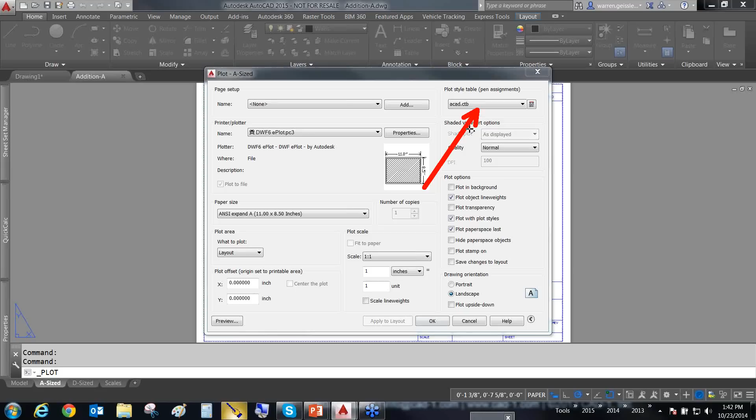When you assign a plot style table, you'll use a drop-down list, and I'll show you where these are stored in a moment, and who's going to be editing them and building them. Autodesk gives you a handful that come prepackaged with the AutoCAD applications, and you can use these as kind of a roadmap. First thing I'm going to say before I even get into editing a plot style table and talking about what color tables are is Autodesk gives you a handful of pre-built color tables to go by.

This is good and bad. Here's the good: use one of these as a roadmap for doing what you want it to do. As an example, if I want to print everything in black and white, I want to start with the one called monochrome. Now here's the bad.

Don't ever set one of these up as your company standard. Why? Because if you do, somebody else is going to, and they're not going to rename those. So if you decide to set one up as your standard, or you want to use one, you're going to find out where they're at in a few moments, and you're going to rename it.

Put your company name there. Put a prefix, a suffix, anything you possibly can. Just don't keep it the same name and use the ones that come right out of the box. That's the same kind of stuff everybody else might be using. And if they send you their drawing and their color table, you're liable to overwrite files with same name issues.

So, I like that. I just saw the one question: what's a pen plotter? Chris, be very, very happy that you don't know what a pen plotter is.

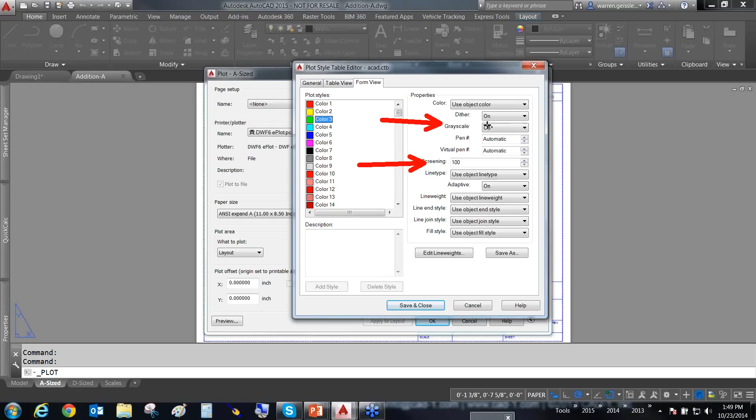Another thing, for the lightweight pens, or where I would use screening, you may want to use a grayscaling and/or a dithering option for those of you with pen plotters. This will help the plotter actually generate the line types, generate the line weights, and generate the screening values that you may want.

Alternatively, you can go call HP and get rid of the pen plotter and go buy yourself a laser jet printer or something else. But for those of you using pen plotters, these are the options that are going to be important to you. Things like line weight don't make a hill of beans difference. The color doesn't make any difference. It's which pen number you're telling it to pick up out of the carousel.

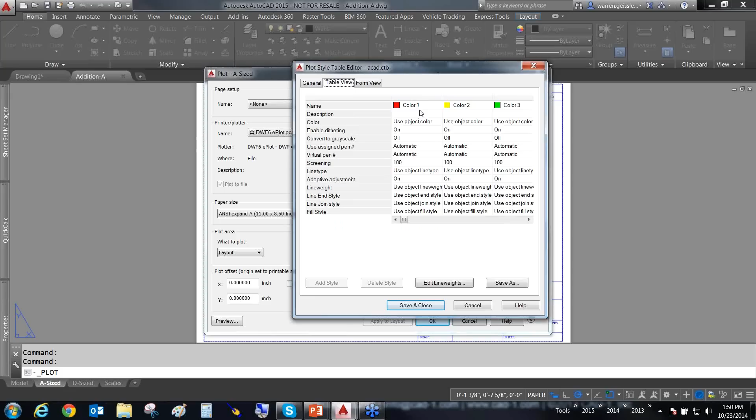Now you'll notice up here we've got 3 tabs. General is just where I'm going to rename it or something. The table view lets me take it a 1 color by 1 color basis - not a great option. So typically when we're in color tables, I'm working on the form view. I'm telling the program I want to take these colors and print them this way, and I want to take that color and maybe that color and print them a different way.

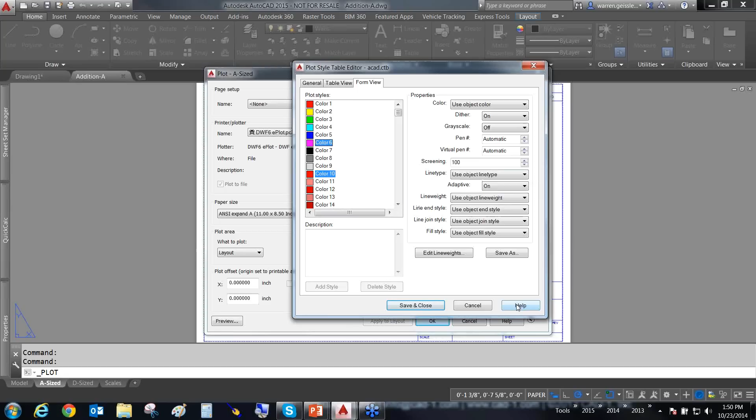More information can always be found inside the help system - it's really handy. But when I get done and I save and close this, it's going to get stored wherever I tell it to store, and I'll show you where those are in a minute. How many of these can I have? Unlimited number of color tables.

Okay, so color tables, CTB files - what are they? They're a plot style table that adjusts things on a color by color basis. Oh yeah, and I did mention something a couple times - I was mentioning that the program's going to be using your logical colors.

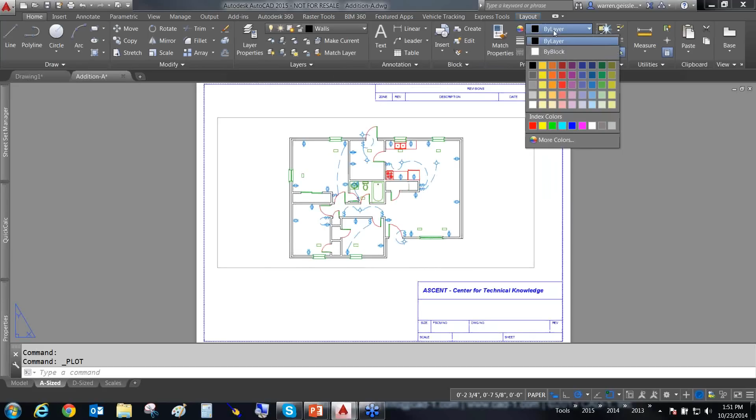When you're setting the color of a layer, we're talking logical colors, or what Autodesk calls index colors. This is something I have to stress to everybody I run into all the time. I'm using a color table system, and I set my colors, but it's still printing in color even though I told it to print in black.

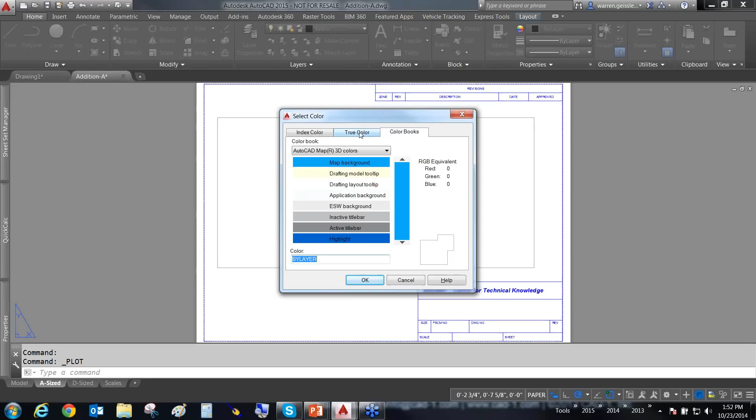How come? Not these - not the true color ones or the color books, which actually use a variance of true color. If you use a true color inside one of your layers, AutoCAD's going to print it whatever color you pick. AutoCAD is mapping these 255 colors to different pens or options, but true color doesn't map those whatsoever.

So the rule here is that if you want to use a color table or a system, you're going to stay away from true color. If I want to print a rendering, a nice background color or palette, or some of the neat gradient hatch patterns, I'm going to use true color. But for everything else, you've got to use the index colors.

Back into the PowerPoint. Okay, so with color tables, look at the color of the object - not necessarily the layer. Hopefully you are all using color by layer, but sometimes we need to override a color on an object by object basis, and it's going to change the plot settings based on that color by color basis.

So the next thing to talk about is the named styles, or what are called STB files. I know that sounds pretty horrible - STB files. What happens when you get a drawing in that's using an STB file, and how do I deal with it? What is an STB file? That's another question we get all the time. Okay, what is an STB?

It kind of takes it in reverse and ignores colors. With an STB file, which I'll show you in a moment, you override the plot settings on an object by object or layer by layer basis - and at no time did I mention color. Basically, I'm going to build a style called thick pen, another called thin pen, and another called medium pen shaded 50%.

And I'm going to apply these styles on an object by object or layer by layer basis. Keep in mind, when I talk about object by object basis, you can apply a plot style to an entity - a line, a polyline, a circle - inside AutoCAD using the property windows. You cannot do this on Civil 3D objects. For those, you've got to get into the layers or styles. So anybody using AutoCAD Architecture with intelligent objects, the object by object basis won't work.

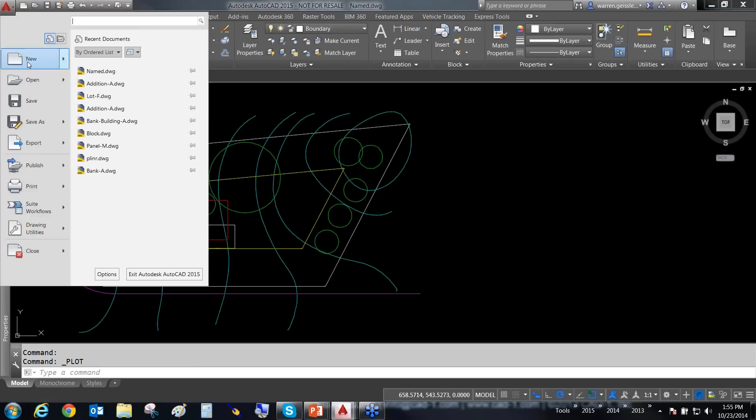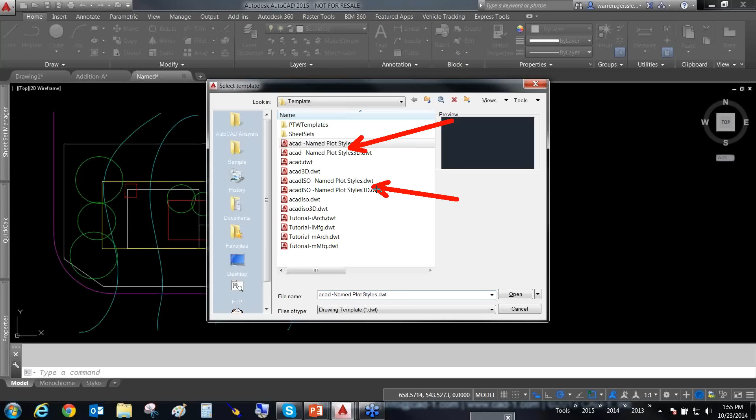Now you'll notice when I got into this drawing and pulled this list down, this is not the same list you saw a moment ago. So how does AutoCAD know which and when? Well, when you start a blank brand new drawing using a template, file new, AutoCAD has whether or not you're using named plot styles as a separate template setting. That's information embedded in the drawing, on a drawing by drawing basis - whether I'm using a color table scheme or a named table scheme. You can only use one or the other, not both. You can switch back and forth between the two, and I'll show you how, but you can only use one or the other at a time.

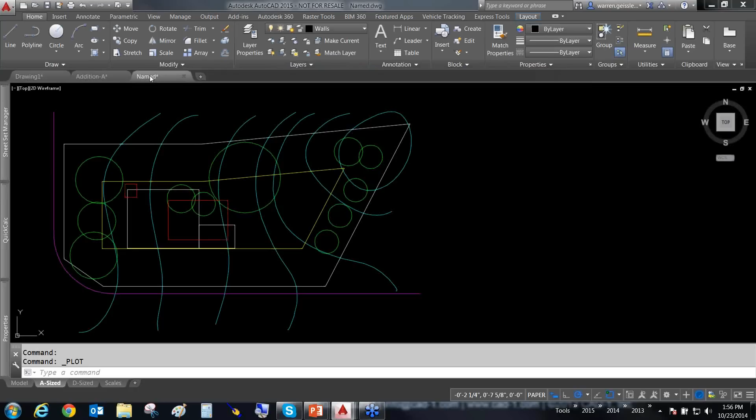So when I'm back in that Addition A drawing and I go to print my drawing, you'll notice I've only got my color tables, my CTB files built in here, not the STB files. When I get back into this other drawing and go to print, you'll notice I've only got those STBs.

So I can only apply one or the other. Now, one thing to always remember, regardless of the system that you're using, the color tables or the named tables, AutoCAD allows you to assign a color table on a layout by layout basis. It would be really nice if we could assign them on a viewport by viewport basis, but they never got that working. I'm going to show you how to fiddle around with that and change it. But it's always on a layout by layout basis.

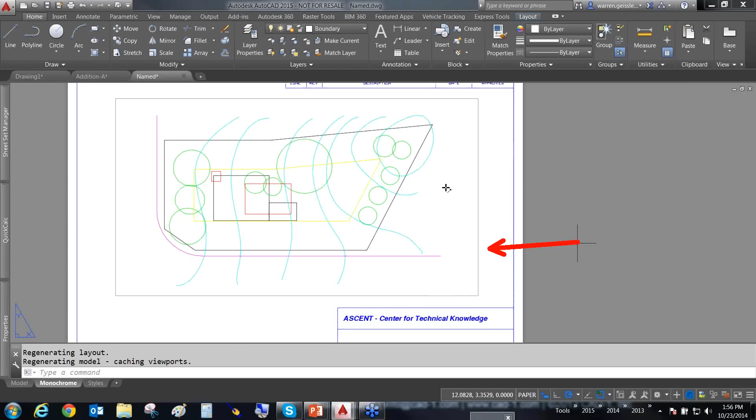So when I come into this layout and I'm going to print, I've got to assign the table that I want to use for this particular layout. I can change my mind at any time in the future, but I've got to assign it as soon as I'm going to print.

Warren, before we get too far away from Taylor's question here, take a gulp of water and a breather, and I'll read this. We have a couple of different color tables and would like to make a simple printout that illustrates the variations in the weights and screening for the various colors. Can you recommend a way to do this?

Unfortunately, not a great way, because, and I'm glad you mentioned that, Stan, because I just mentioned your limitation right there, is you can only assign a table, regardless of the type of table that you're using, on a layout by layout basis.

So really what you want to do is have your line work, like you'll see a lot of CAD standards will have a drawing with a bunch of lines and the colors and how they print, etc. But you'll want to do this on a couple of different layouts and assign each layout that appropriate color table.

And then print it and put the header on it and say color table A, and this is how your line work is going to look, and then another drawing right behind it, color table B, and how your drawing is going to look. You can't put it both on one drawing or all three or four of them on one drawing, but you set up a handful of little 8.5 by 11 sheets with the line work on there, and you show the before and after colors.

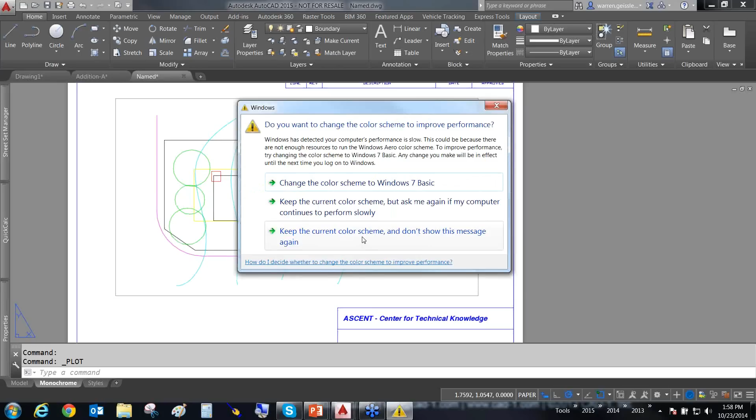Whoa. Every time I answer this question, 'don't show me this message again' keeps asking me that question. Don't show me that message.

Okay, so getting back to my named system here, notice I've got a couple of layouts inside here, and this one I've called monochrome. So when I go to print this one, I want it to print monochrome, so I'm going to assign it that monochrome table, and when I preview it...

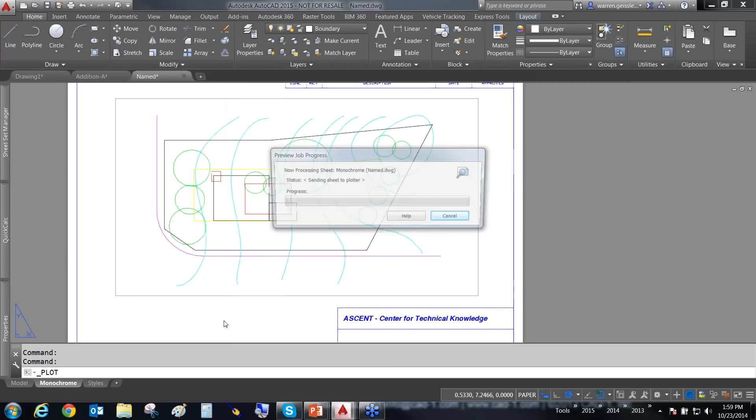Okay, nothing actually happened. So how come? And that's one of the questions that I get all the time. So, did you say that you did want to plot with the plot styles? A lot of times people will leave that unchecked. Or how else were you working on here?

Okay, the monochrome STB, what is the program supposed to do? It's supposed to print everything black. But wait, remember what I said. In the color table, AutoCAD's taking all of these colors and it's printing them black.

With a style table, you build your style black, and you have to apply your table on a layer-by-layer basis. So how would I wind up doing that?

Okay, this is where things can get a little bit difficult. I'd have to go into my layers, and I'm going to have to apply the plot style on a layer-by-layer basis. Now, I'm going to get a little bit ahead of myself. But wait, Warren, what if I wanted this one to plot one way, and I wanted this one over here to plot another way? Then I apply the plot style on a layer-by-layer basis as a viewport override.

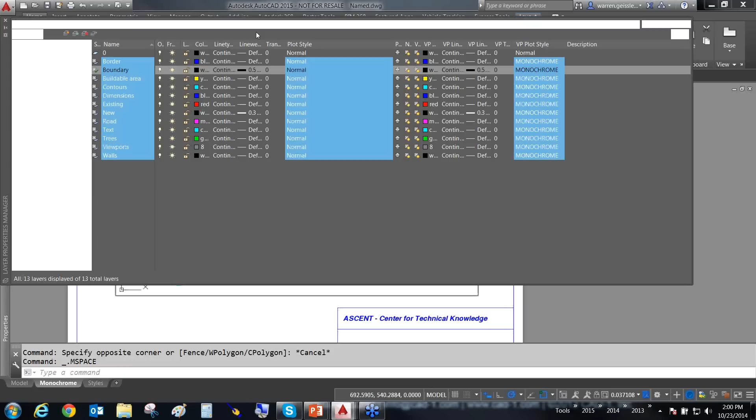I'll talk a little bit more in a moment about those viewport overrides. So I'm going to be doing those viewport plot styles, and I set those up, and that's how you're going to be taking care of it.

It's a viewport plot style. Now, what about this one right here? What if I wanted to plot that one different? I could do the same thing, and I've got the style table.

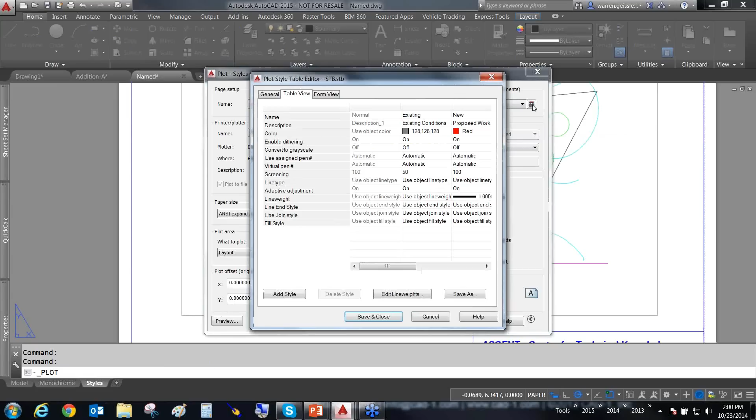This is where, when building a style table, you're going to tell the program—as you see here, I've got a handful of them in here—that I've built a handful of styles. How do I want my objects to print? So at this point, I'm not thinking about how I want this color to print. I'm thinking about how I want my drawing to print.

As if I were on a table drafting and I want to pick up a thick pen or a thin pen or a shaded or something else. So you'll see here I've got one style called existing conditions where I want it to print gray and use the object line weight. And proposed work, I want all my proposed work to print red and a thicker line weight. And my ground to print.

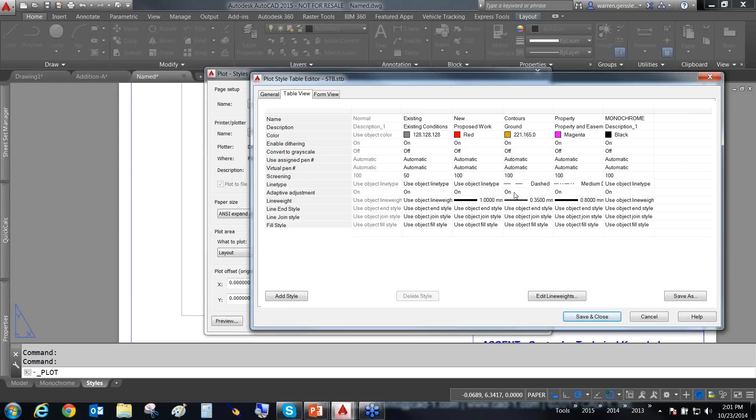So you see here, what I'm doing is I'm building how I want these objects to print, and then building a table out of that so that after I've done this, when I go to print my drawing and I've applied that table, that's what I'm going to wind up seeing. At no point did I worry about colors.

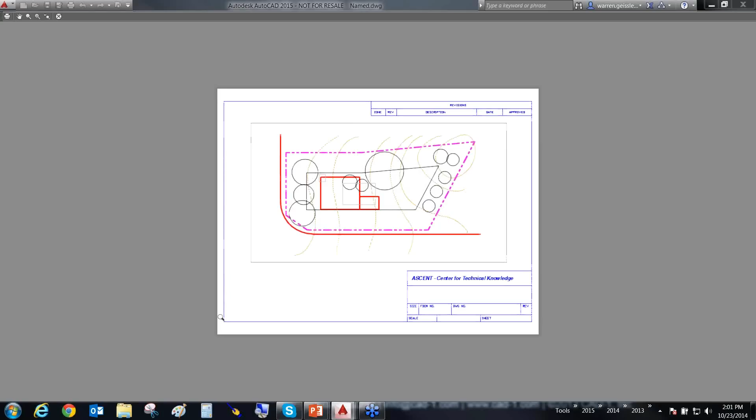Okay, so what color is the layer? What I did was I said, I want my proposed work—and actually my proposed work is on 2 or 3 different layers, and those layers are 2 or 3 different colors. I don't care. I want my proposed work to print red, and I assign that table to either my objects or my layers.

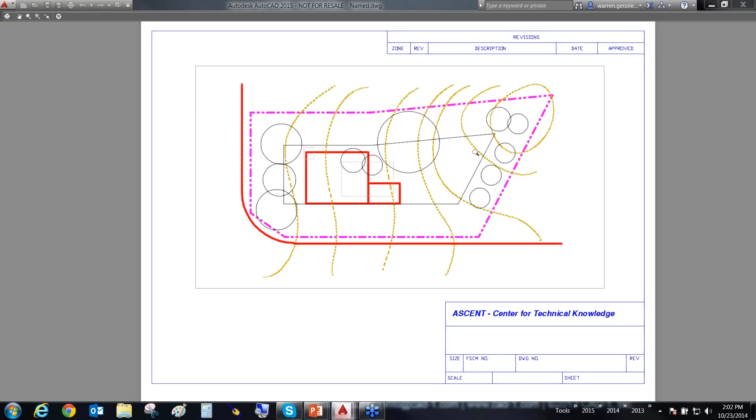Okay, what about all my existing work? You'll notice here that I've got an existing property line or something else, and all these trees and some existing stuff, and I've got those printing with the existing pen. So in this type of situation, I've applied that plot style inside that layout, and I've applied those styles, those names, to either my objects or to my layers.

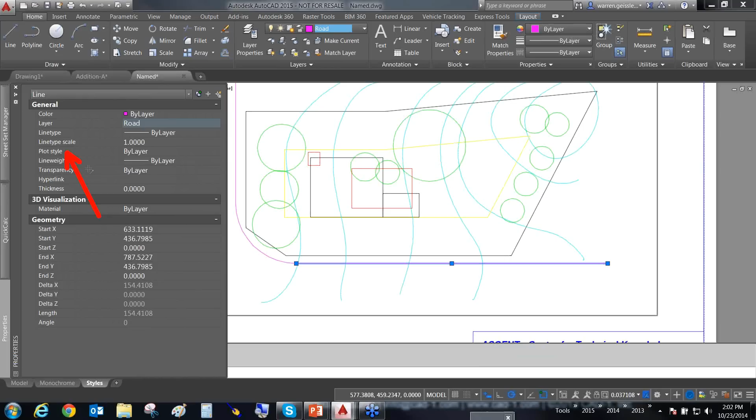How do you apply it to objects? Oh, real easy—like I said, properties window. You'll notice that my plot style option right up here, I can apply a plot style to an object by object basis. So this is where things can get really flaky too, everybody.

We've had for years and years, I want all my colors to print certain ways, but in this instance, I want this object to print one way and another object on the same layer to print a different way. You can really get kind of in-depth in here.

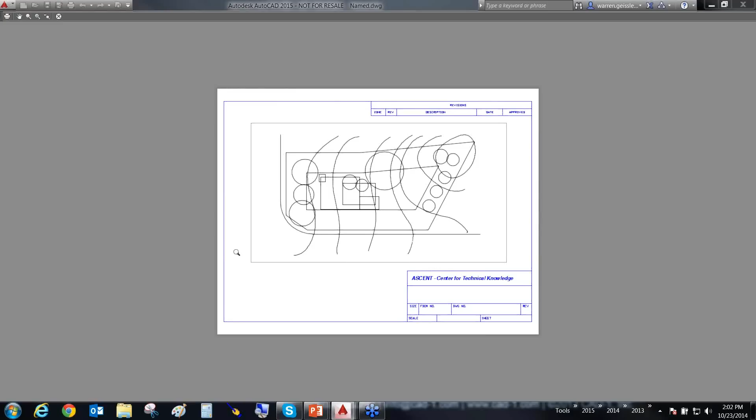Come back to my monochrome print, and I want to change it, and I want to print it, and I'm looking at it, and there it goes. There's my monochrome print because I assigned the monochrome print style to all of those objects. And I said, just take everything and print them black.

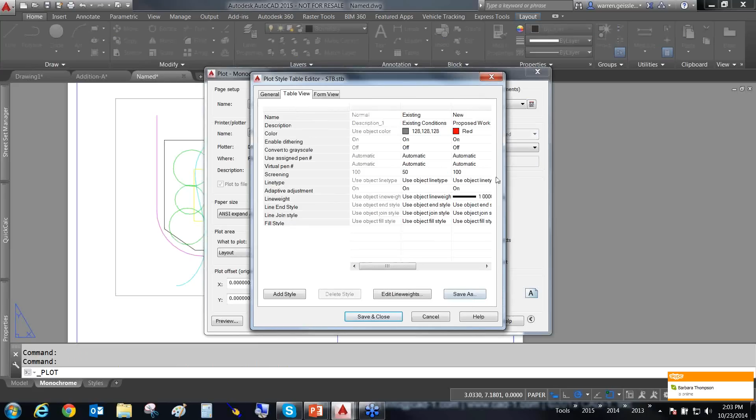So in this instance, I don't have to worry about grabbing a bunch of colors or anything else. I'm just creating a table of how I want to see things on a sheet of paper. How do you want to see things on that sheet of paper? And then you're going to apply them on a layer by layer basis.

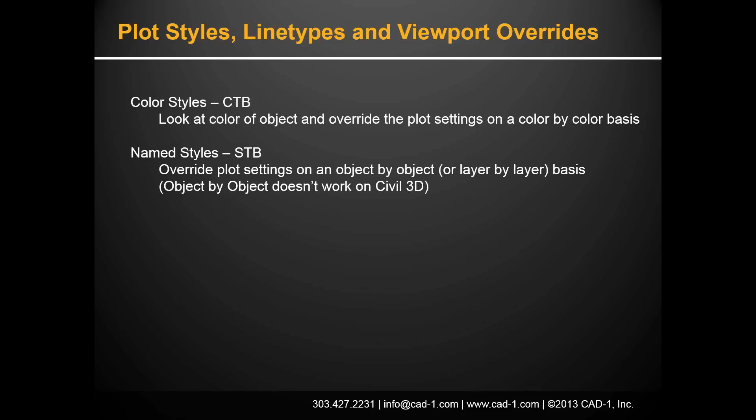Let me get back into my little reminders here. Okay, so color tables take all of a specific color, and it only works for those logical colors, 255 colors. Name tables, style tables—I tell it how I want it to print and apply it to a layer by layer, object by object basis, or a combination of the two, and colors of the layer are completely irrelevant.

Where are these files, Warren? Where do they exist? Every time I go to print, I'm having to tell it where these files are. Or what if I get a drawing in from a consultant and they send me one of those CTBs or STBs? What do I do with it?

Where are those files? Okay, quick, easy, down and dirty way of—I just got a drawing in, I just got the consultant's STB, and I want to print it. How do I do that?

Fastest way to take care of it is in your application menu. You come down here where it says print, and you look down where it says manage plot styles. There they are—that's where my computer is looking for the plot styles.

So without having to worry about changing your files tab in your options, which I'm going to show you, and getting into CAD management, getting into IT management to find out where it is - because I could have told you it's under C users, login name, app data, roaming, Autodesk - and I'm talking and talking, and you're phasing out.

So don't worry about it. Don't worry about going into Windows Explorer trying to find something. AutoCAD knows exactly where it is. Application menu, print, manage plot styles - Bob's your uncle, there you are. All you've got to do is drag and drop.

When I pick that, by the way, this is Windows Explorer. So all you've got to do is open up the email they sent you, open up Windows Explorer, and drag and drop right into this location. What if I've got two that have the same name?

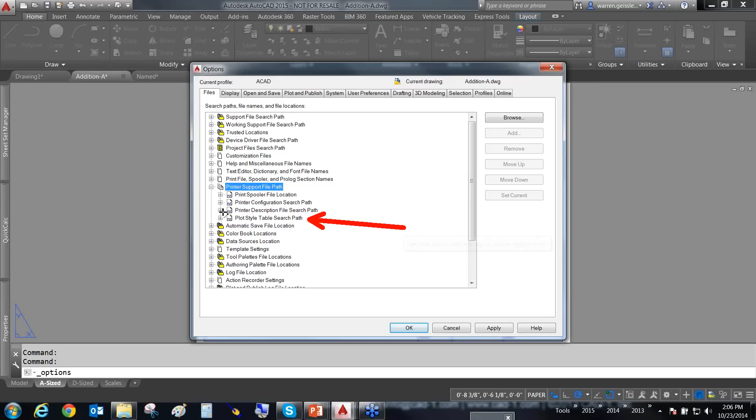So all I've got to do is take my plot styles off of somebody's computer, put them up on the server, and then come over to everybody's computer and point to that one location on the server. Then we're all using the same ones.

Well, doesn't that mean that if somebody changes one, everybody's going to see the changes? Yes, and that's probably a good thing, unless you're the CAD manager and you don't want everybody changing them, in which case you lock that directory and give it user-level permissions, or go around with a big oak stick beating on people for changing your files. But it's in the Files tab, and you tell everybody not to mess with it, go through CAD management, but everybody gets to share all of your plot styles in one location. Pretty easy.

That's where those files exist, and that's what they look like.

So what are the plot settings we're talking about, and what kinds of things can we change? Actually, I should have put that at the top of the list since I already went over it. As you open up each one of those, you can override the object's color, the line weight, the line type, etc.

It's called reinforcement. Reinforcement, that's right. Reinforcing the learning, that's right. Can I change my mind? We have this all the time.

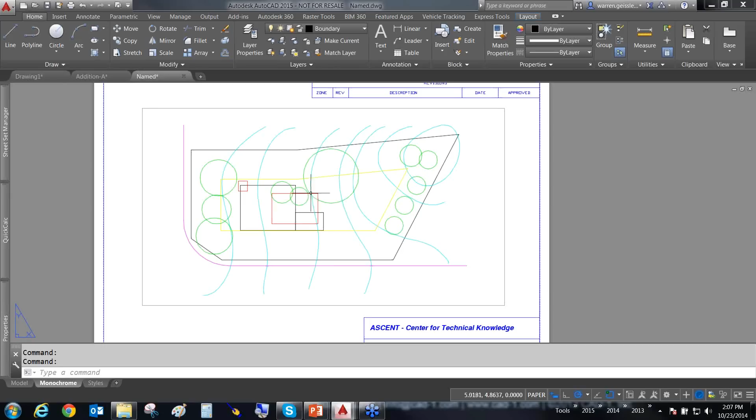I had a company that got into named plot styles and started playing around with them. One or two people in the company thought these were the best things since sliced bread - it made life really, really easy. And everybody else said, okay, but when I print, what color does this red print out?

And they kept saying, well, I don't know - what layer is it on? I don't know what layer it's on. It's like 500 things, I just want to know what color this red is going to print out at. So basically, we were having a bit of an issue getting them migrated over to this whole named style system, and they were going a little bit crazy.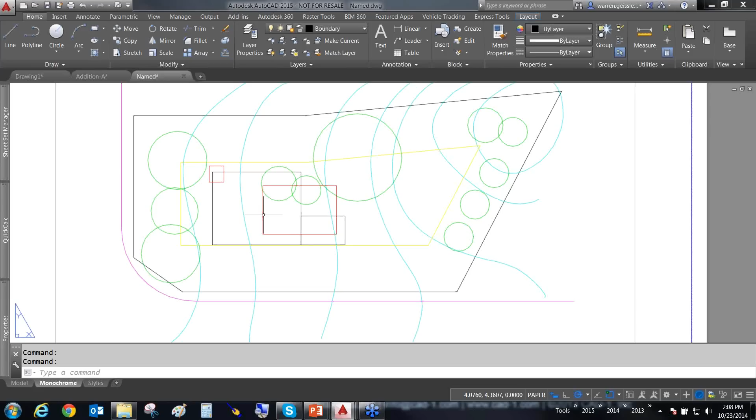After about 10 months, the company decided named plot styles just weren't working for the mentality of their users, and they needed to switch back to color tables. This was after we had done a whole bunch of projects and there were a bunch of drawings. So how do you fix it? Can you change your mind? Yes, you can - there is a command in AutoCAD.

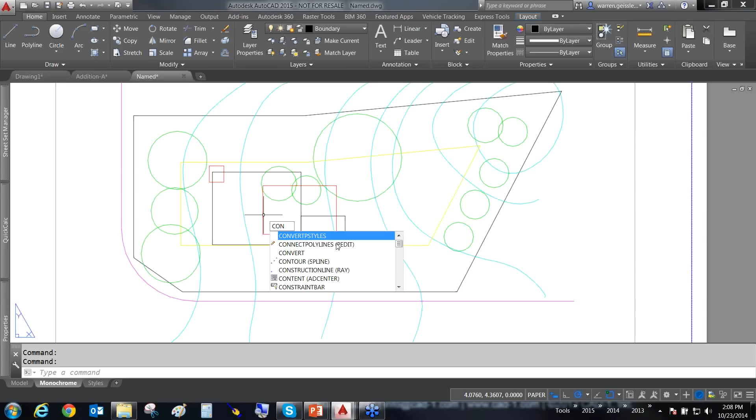Con-E-R-T. Notice what I spelled and what AutoCAD's finding for me? I love autocorrect, that's the coolest thing in the world. It says, okay, I know you typed convert, but there's no such thing. So what about this? Okay, anyway.

So the command you're looking for is this one right here, Convert P Styles. That's one you're going to want to use. This will allow you to take a CTB drawing, a drawing that's using CTBs, and change it to STBs. This is how they migrated all their existing drawings so they could use the color or style table system, just with one command. All plot style names, everything gets changed over. You can also convert from the STB system back into the CTB system.

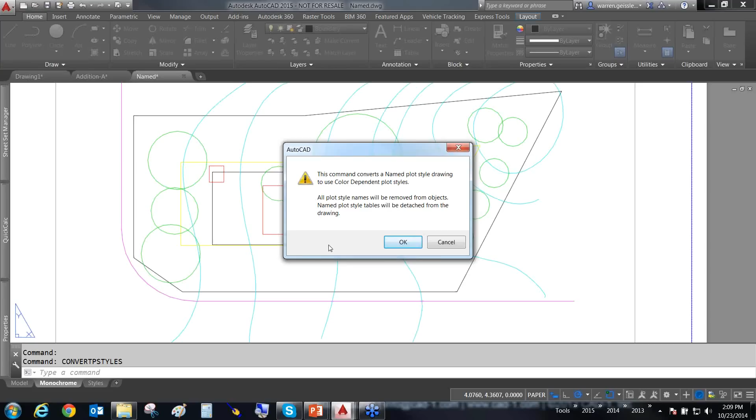Now, if you're using the color table system and want to convert to a named style system, but don't want to go through and reassign everything, you've also got this command, it's called Convert CTB. It'll take your current color table and convert it to a named style table, and all you have to do is go in and change the names from color 1, color 2, color 3 to thick, thin, back-shaded, or whatever. So if you've got a really cool color table, rather than reinventing the wheel and rebuilding a whole new style table, you use this command, and you can convert your existing color table over to a style table. Bob's your uncle, do a little bit of changing, and go play 9 holes of golf.

And with that, Joe asks, are the STB and CTB files stored together in the same folder?

Yes, sir, they are. As I mentioned before, if you come down here in your application menu to print, and you look at where it says Manage Plot Styles, take a look at that list. You're going to see my CTBs and you'll see my STBs, they're all in the same location. You cannot separate them out into two different locations. If you do, you'll wind up having to go and tell AutoCAD where to look, one time to another. So you want to plug all of these into one folder, one location, and don't use the same name. Seriously. And yes, with that said, Bob's my uncle.

And what happens if you have PCP files and want to change the CTB, or PC3 files, that comes in from Cornelius. Okay, the plotter configuration you're talking about there, that's not necessarily your plot styles, but it might have to do with a pen table. Your PC3 files are your printer...

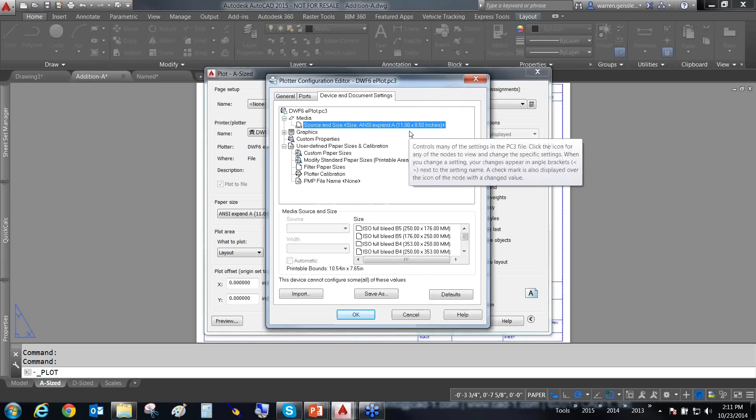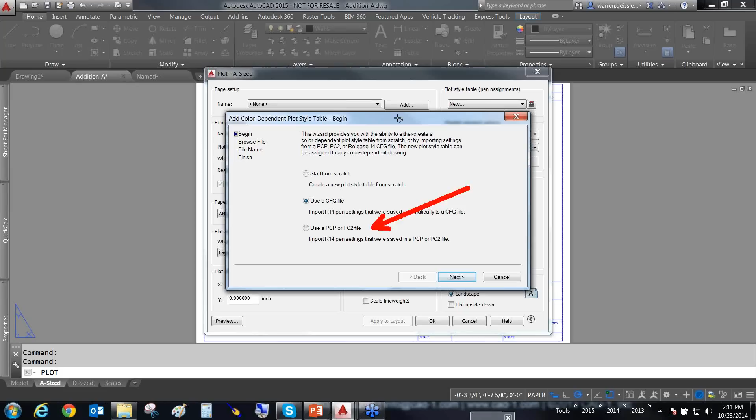property files. If you want to take an old PCP file and turn it into a color table, that's where I could go down here and choose New for my color table, and import the settings from an old PCP or PC2 file. Now the actual plot settings, the driver settings, not the color table settings, but the driver settings, that's something you're going to have to rework and build into your PC3 files. But what Autodesk did with those old PCP or PC2 files, I'll give you an idea what I'm talking about. A PCP file was not only the drivers, which plotting device am I sending it to, what type of driver am I using, what HDI drivers, is it an HP driver, but it also had all of my color table information stored inside one file.

So many, many years ago, Autodesk split the two of them out. This is your PC3 information, which is your plotting device information, the drivers you're using, the plotter you're using, and then it took out the plot style or color tables and plugged it in up here. So it split it in half, and that's where both of them went. If I want to reuse an old PCP or PC2 file, I just go up here to New and say I want to use an old PCP or PC2 file. Good luck with that. If you get it to work properly and don't have to do a lot of post-processing, then congratulations. I'll be quite honest, the times I've tried to do this, I spent as much time post-processing what it imported as I would have spent if I'd just created a new one manually.

Okay, so we've got a few other questions here. Warren, Daniel asked, during the conversion, does it delete the other file or the other table? It does not delete the table.

For the Convert Plot Styles command, it converts the color style table to the drawing using the name style table, or vice versa. The tables are all safe and secured. Those are files. If I want to get rid of those files, I've got to go into Windows Explorer, like you just saw a moment ago, and manually delete them. It will not delete the files.

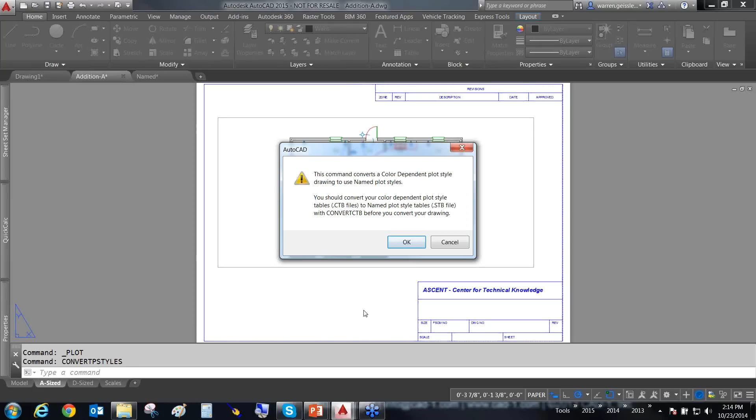Joe asks, what is the Add a Plot Style Wizard for? I would answer: sending young women back to Kansas. That's kind of obscure, so... Oh, that's a bad one. Okay, let me get back in. That's a bad one, Sam.

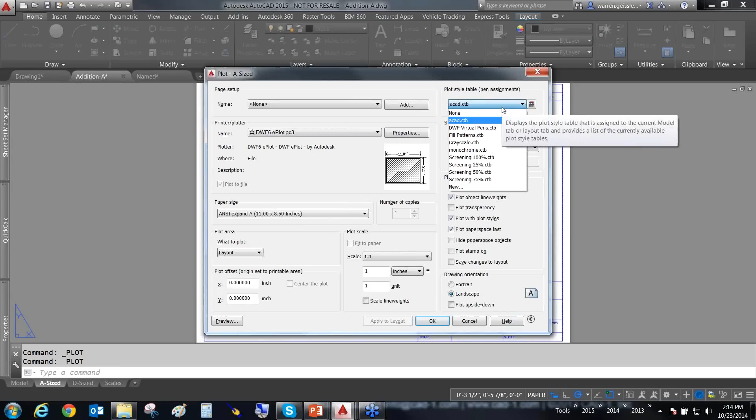Your Add a Plot Style Wizard is for when you go to create a new plot style. This guy right here - I click New - this is the wizard, the Add a Plot Style Wizard. I'm glad you mentioned that, because that brings up some tech support that Denny's going to thank me for mentioning in just a moment. So this is your wizard, basically. Now let me talk about this.

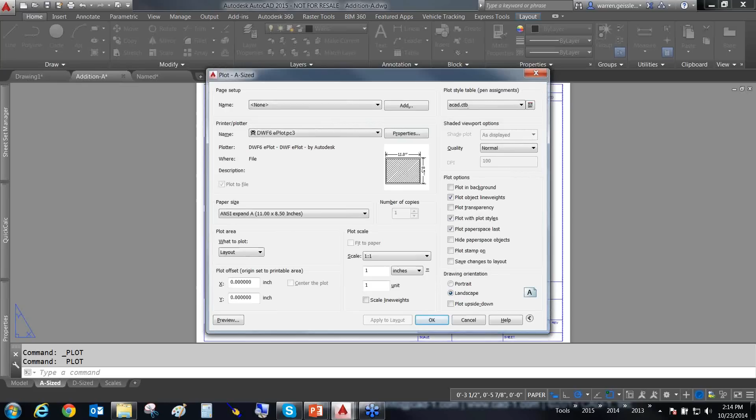Glad he mentioned this. A moment ago I mentioned that if you want to grab your plot styles and put them up on the server, you grab your files, put them up on the server, go to the printer support file search path, go to the plot style table, and change this. That's exactly what I meant.

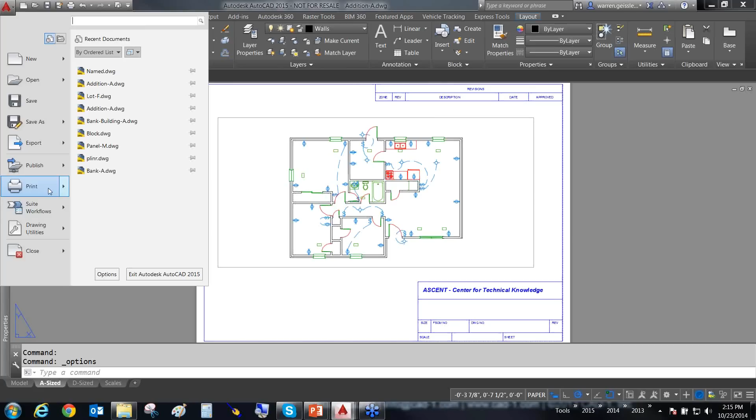You're going to come up here, go to Print, Manage Plot Styles, and grab all of the plot styles and move them up to the server. You are not, in any way, shape, or form, going to grab this wizard, which is a shortcut, and move it up to the server. Please do not move this shortcut to the server.

This shortcut is referencing files on your C drive under your login name. So whenever anybody goes to access the plot files or the color tables, it's going to read the shortcut and try to find a location that is not on their computer, because they don't log in with your name. And if they do, you've got bigger problems than AutoCAD can fix.

But anyway, every time they access it, license compliance will be contacting you soon. Yeah, the license compliance will come down on you.

Watch out. Every time you open up this folder or use the drop-down for the color tables, if AutoCAD finds this shortcut inside that folder, AutoCAD's going to attempt to read that shortcut and the location for it. So do not, last time, do not move this Add a Plot Style Table Wizard shortcut with your plot styles. Thank you for mentioning that.

I have one or two more things I want to make sure we cover. I did talk about switching from color table to named table, and vice versa. If you're going from a color table into a named table, you can actually pull in your old color table styles. You cannot do that in reverse - I can't take a named style table and apply it on a color by color basis.

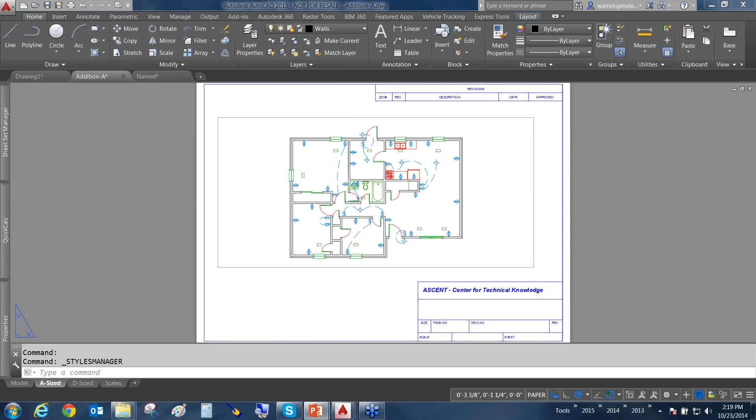That's just impossible. The last question that always pops up - I said this at the very beginning when we were talking about color tables - you can apply them on a layout by layout basis. So what if I've got lots of different viewports and I want them to print differently? What if I've got a drawing with many viewports of different scales, etc., and I want each viewport to print differently?

Way back 100 years ago, when AutoCAD 2000 first came out, one thing people don't know is that they tried this. You used to be able to take an individual plot style table, a color table, and apply it on a viewport by viewport basis. The technology never did work, so it got taken out and locked down, which is why it's not really there anymore.

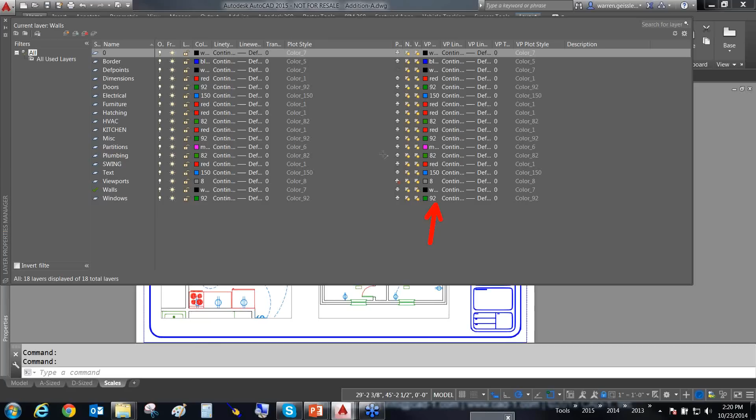So what do we wind up having to do? Many years later, Autodesk ended up saying, okay, if I open up my viewport inside my layout, I've got all my viewport overrides. So if I'm using a color table and I know my red is going to plot thick, and in this viewport I want all my layers to plot thick, fine - I can override all my layers in this viewport so they will be red and plot thick.

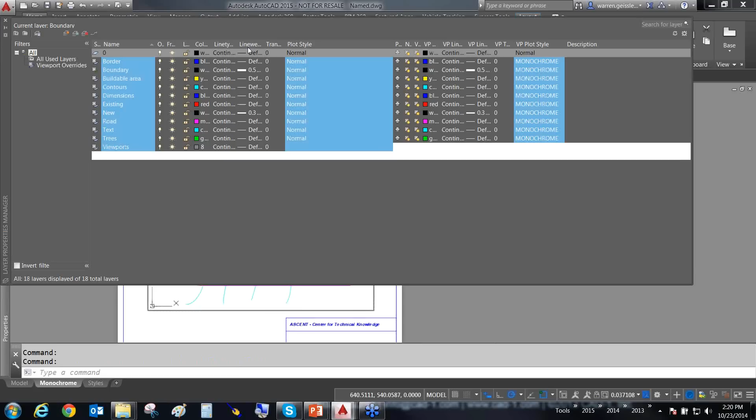What if I'm using a named plot style? How do I do that? Well, it's even easier. For a named plot style, I can override the plot style table on a viewport by viewport basis. This one's supposed to be using the normal one, and I told it to use monochrome instead. So if you've got a drawing with multiple viewports and want them to print differently, just use the viewport overrides for color, etc. You can do the same thing with line types.

Another question that keeps popping up - people ask, all right, I'm going to plot this drawing, it's got multiple viewports, but the line types don't look good. The dash line type isn't looking good between all my viewports. The variables that everybody needs to memorize - the last thing I'll talk about - is LT scale.

Notice how I misspelled that again. I did that on purpose, really. I'm not typing with 3 fingers.

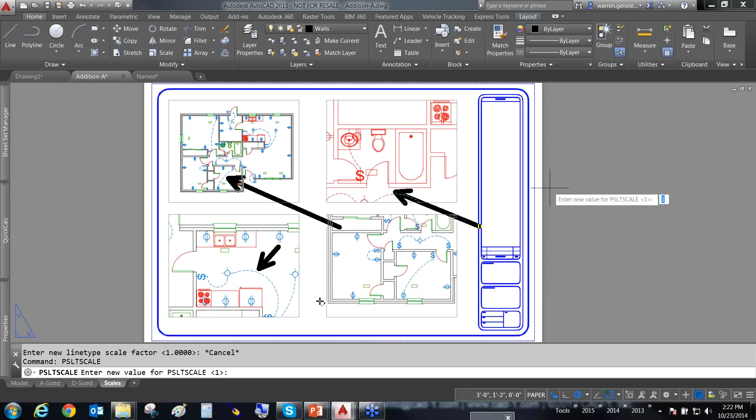LTSCALE controls how all of your line types look throughout the drawing. I want to set this to 1, meaning I'm printing my layout at a 1-to-1 scale. So I need to set my LTSCALE to 1. When I do that, I also set my PSLTSCALE, my paper space line type scaling, to 1 as well. When I set that to 1, it's going to take each of these differently scaled viewports and apply that scale factor for each of my line types so they all come out looking exactly the same.

But wait, if I set my line type scale to 1 and go into model space, then zoom in and zoom in, all my lines are really, really tiny. I've got an 1/8 of an inch dash. How do I fix that?

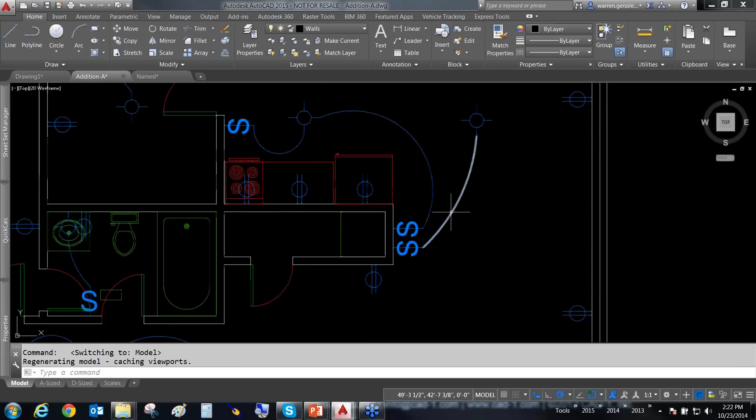As of 2010, you have MSLTSCALE, a third variable that a lot of people don't know is out there. When you set MSLTSCALE to 1, that means your model space line types will scale appropriately according to your annotation scale.

I changed that to something like 1/4 of an inch, regen my drawing, and there you go—those line types look good. Just got to remember to regen the drawing. So: LTSCALE set to 1, PSLTSCALE set to 1, MSLTSCALE set to 1. Bob's your uncle—you set all of that right inside one template and never have to worry about it again.

Excellent, Warren. Mike's got a question here: discuss issues with plotting in 2012 OEM. I can't—well, unfortunately I don't know the OEM version. What version? 2012, okay.

So that's after annotative scaling, so you've got all of the MSLTSCALE, color tables, and everything else. To the best of my knowledge, you should not have any problems, issues, or be unable to do anything that I'm doing here. If that does seem to be the case, we might need to know what it is and see if it's a limitation of the OEM version. Unfortunately, we don't have applications here that use the OEM version, so we might need to hook up to your computer and take a quick peek at what's going on. But that's technology—it should not be crippled or limited whatsoever.

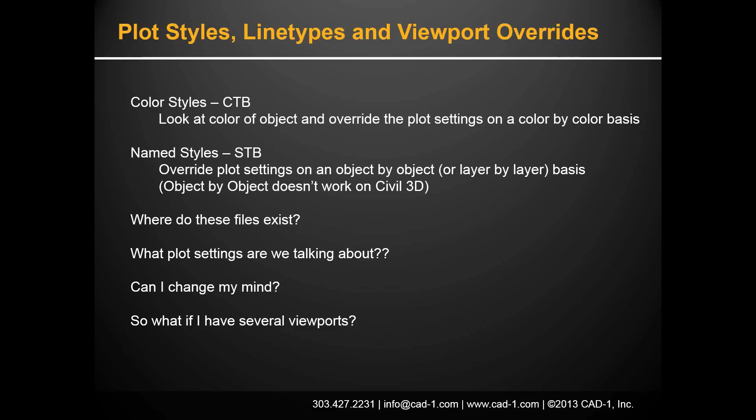Joe asks: when you set up a sheet to plot using DWF6 ePlot.pc3, how do you handle the print borders? On plotting machines, the printable area is less than the sheet size. Does the DWF6 ePlot to the edge of the paper? The DWF6 ePlot PC3 basically will plot—it's a virtual printing device similar to a PDF, and all of that is hard-coded into the PC3 options.

So if I'm looking at things like the standard printable area, I can come into my options for the PC3 and specify or modify that. So if I've got an ANSI A, 8.5 by 11, I could come in here and modify those. All of those are hard-coded in, and remember we can adjust all of those and build them into your PC3 file for all of your virtual devices.

And I'm going to stress this: virtual devices, a DWF and a PDF, are virtual printers—they're printing a file. Even if you're printing a TIFF image or a BMP, yes, you can do it there.

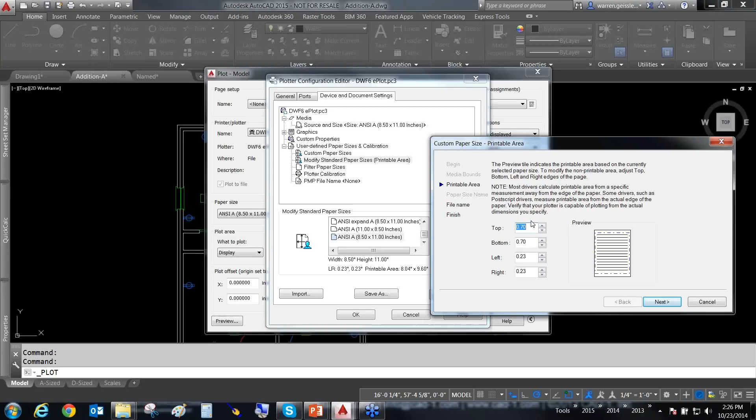Don't really mess with this unless you really know what you're doing and want to spend a lot of time, money, and effort going back and forth. Don't mess with this on a hard device, because with hard printers, this information is hard-coded into the actual device. In other words, if I've got an HP DesignJet 600 and I come in here and set these numbers—my edges of paper—to 0, that doesn't mean the HP 600 is actually going to be able to print all the way to the edges of the paper. So a lot of that information is hard-coded, and you need to look at your user's manual for those devices. But for the virtual devices, this is where you can change that information.

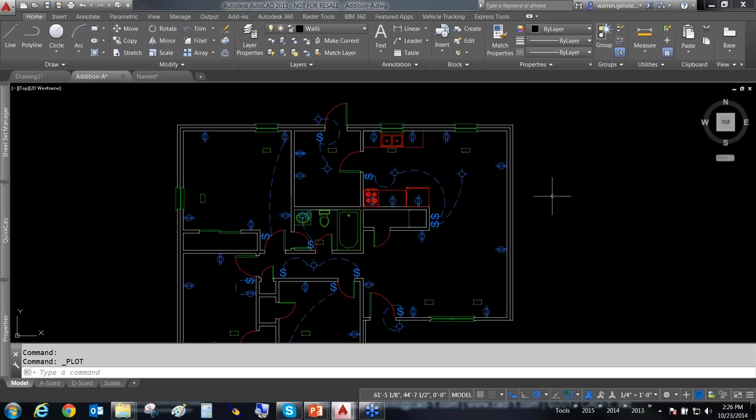The thing to watch out for in a block, if a block or symbol in AutoCAD isn't printing the way you think it should by putting it on an appropriate layer, the first thing to always check is go into the block editor and make certain that these objects are on layer 0 and that they're color by layer.

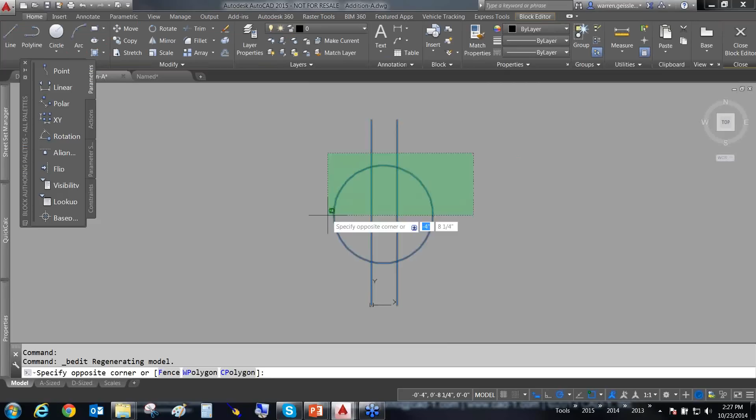You'll notice if I grab these, they were obviously drawn by somebody who didn't know how to do that. They put them on the electrical layer, but at least it's color by layer, so at least I know what layer to deal with.

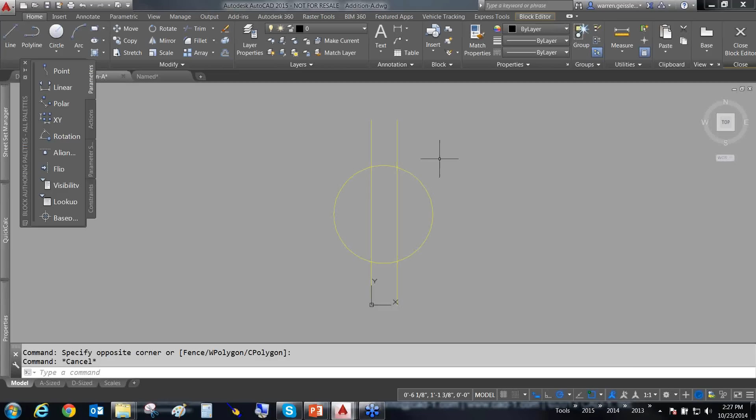A lot of times what I find is somebody has overridden the color of a particular object inside the block editor. So even if I've got it on a particular layer, it may not plot properly. Let me undo that, because I hate that.

Alternatively, this block right here, when I drew it up, was drawn on the electrical layer. That means if I grab this block and put it on any other layer, it won't change. The problem is if I put it on a layer with a really close color, I may not notice the color didn't change. This color is color 130, and the other color is color 5.

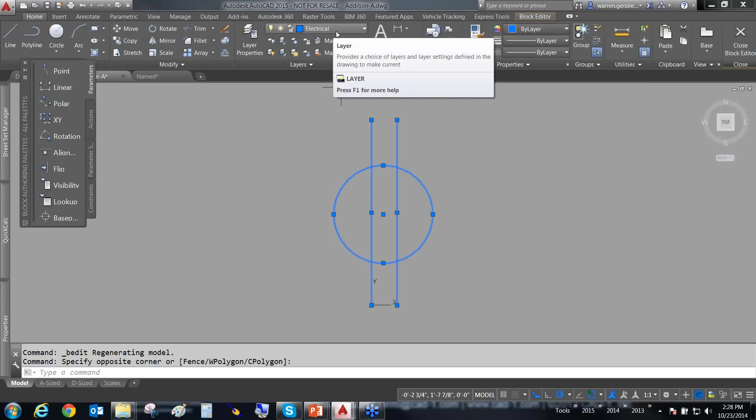So the first thing to always look at with blocks: go into the block editor, make sure the objects are on layer 0. If they're not, the color of the parent layer is going to override anything else you're trying to do. And also make sure it's color by layer. That's the first thing.

Mary Beth, we're not cutting out, we're just fading into the past.

James thanks you for the MSLT scale. He really appreciates that one.

Steve's got a question. We have 2 CAD stations and printers on the office network. I set up a saved plot style on one station. The other station can't plot using the same style. Is that a Windows printer issue, or what?

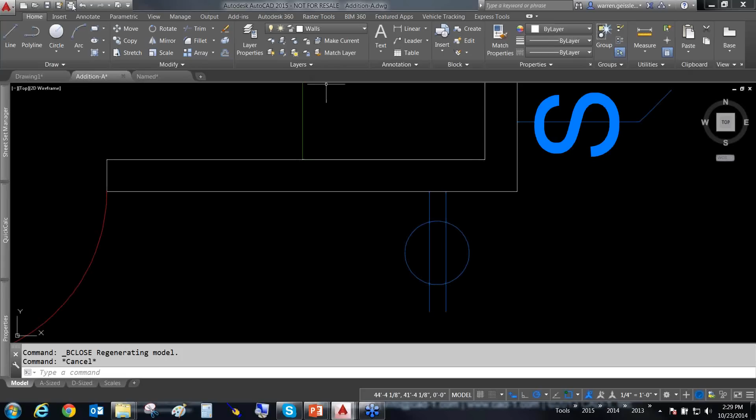For that one, I'd have to ask, it sounds to me like you're talking PC3s, not plot styles. When we talk plot styles, we're talking about these color tables. These are device independent, so regardless of what device you're sending it to, these plot styles should work. If I choose a monochrome plot style and assign it, it doesn't matter what device I'm sending it to.

So if you're having an issue where you do know what you're talking about, and you do mean plot styles, and something's not right, that's when we need to do some tech support and find out what's going on, because these are device independent. Doesn't matter what device I send it to, this drawing is going to come out black and white.

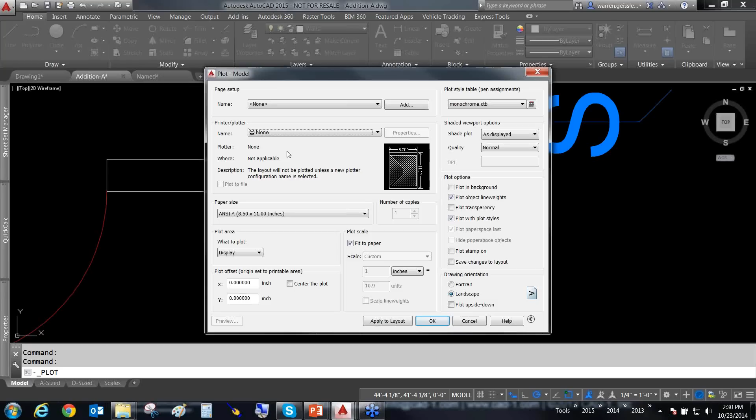Now, if it's these PC3s you're talking about, those are really, really tricky. When you build a PC3, or a plot configuration for a particular device, you can't use a PC3 on somebody else's computer. It could be that they don't have the same drivers on their computer.

Here's another one, which is really goofy. I go over to my devices and printers, and everybody's got this HP LaserJet 4000. How come I can't just share my PC3? Well, it's because when the IT manager installed this driver on my computer, this is what he called it. And on John's computer, he just typed in the word 4000. So all of a sudden, my AutoCAD PC3s aren't working.

So not only does the device have to be the same, the driver has to be the same, the driver version has to be the same, and the name you put inside Windows all has to be the same in order for those PC3s to work on a computer-by-computer basis.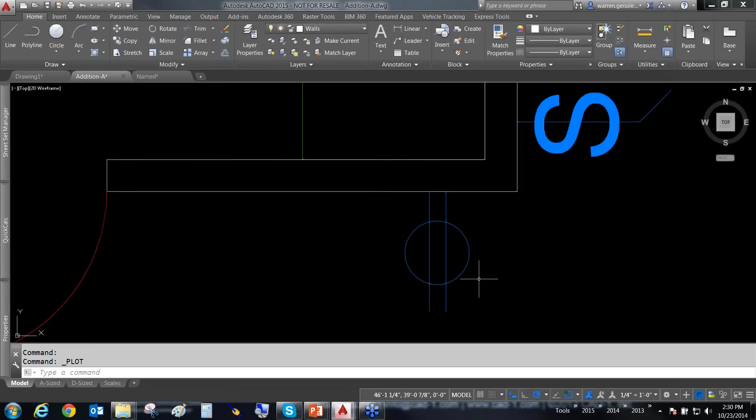Jay asks, Warren, this is kind of Civil 3D related. Why do Civil 3D points text size change from model space to paper space? Yep, you're scaling.

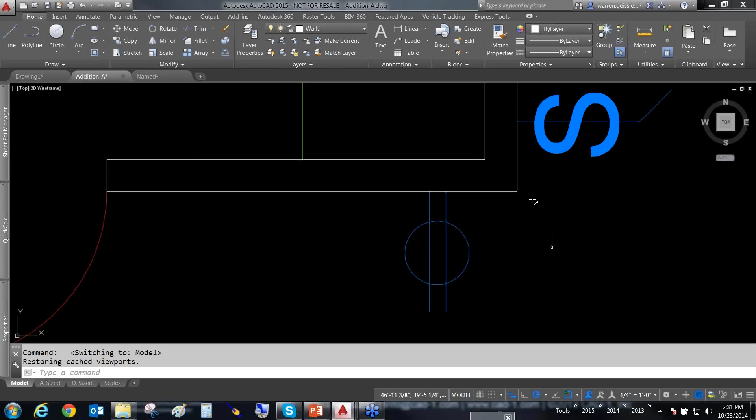Your text size will change depending on what you set in model space when you're preparing to print. You all know you can print out from model space for a check print, so I've specified what I think I'm going to print at. But when I come into paper space and set up a viewport, I'm at a completely different scale factor. Scale factors have to be exactly the same inside the viewport as they are in model space for the text to print correctly.

So if you've got any kind of question, show up at one of these webinars and get it answered. One of the things we always say is that it's Car Talk without the Boston accent.

I like that, Jeff. I can talk with a Boston accent. I'll hurt myself, but I can talk. I've got to park my car. But one of the things we tell people on those webinars is that we will answer every one of your questions.

Regardless of the question you have, of course, just as long as you understand that the words 'I don't know' is a valid answer.

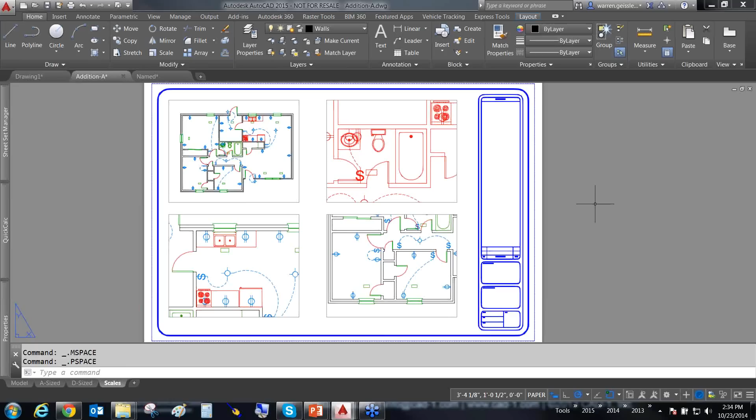We got one more: how many consultants are using STBs these days? Not many, but there are some big ones, and I'm not going to drop any names. Some, like Tetra Tech, are using STBs and using them successfully. It was a great idea when it came out and didn't really take off, but the ones using it are using it very successfully, as long as your users get out of that whole color mindset kind of thing.